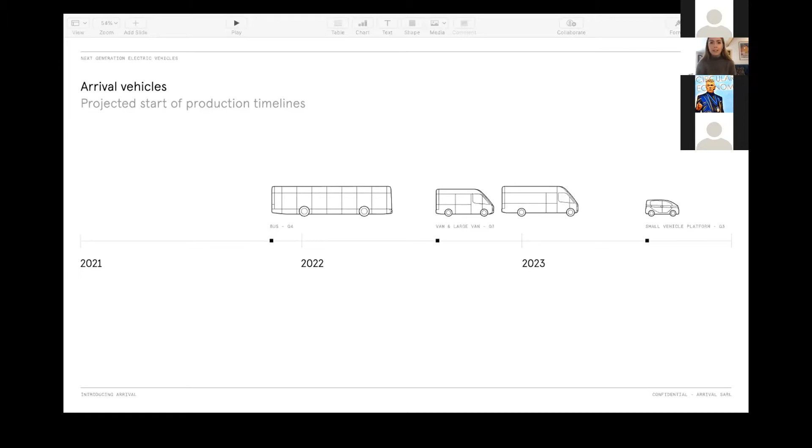So we're currently at pre-production mode with our bus coming out early next year, and our van shortly afterwards in late 2022 and early 2023. So this is a really exciting time for us. We've been in R&D mode, and we're really starting to transition out of that phase and become a very serious player on the global stage.

This is our van, which you may have seen in various news announcements. You can see that it's very different from what you might expect from a traditional Ford Transit van. This is because we've designed completely around the drivers. They've been very integral to the design process. We've had to think, well, this doesn't just need to function as a vehicle, but it's also somebody's place of work. And if you're spending 8 to 10 hours a day in this vehicle, it really needs to function as seamlessly and smoothly as possible.

And our bus, I never really thought I could be excited about a bus, but honestly, it really is a beautiful piece of engineering and has been designed with completely the same consideration to drivers and passengers as our vans. And I guess not just our passengers and drivers, but actually anyone who has to interact with these vehicles.

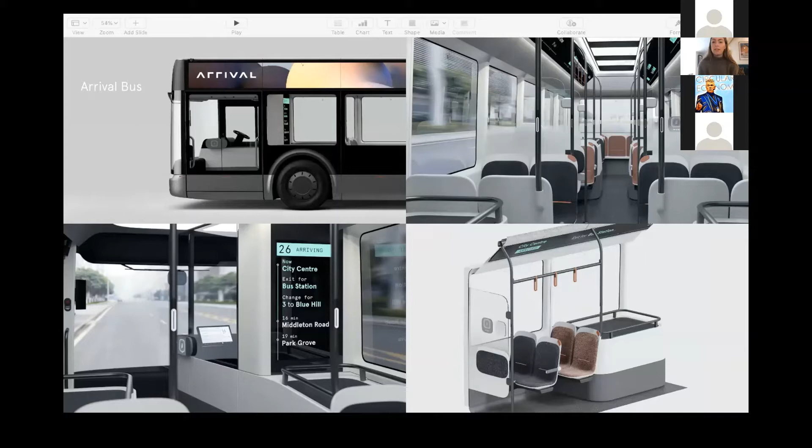So you'll notice on the bottom right hand side that the seats are actually on a cantilever. This is because we know that cleaners only have 4 minutes to clean each bus at the end of each day. So we want to limit any kind of grooves or spaces that they have to clean around so that we can create the cleanest bus possible in the shortest amount of time.

So how have we been doing this? Why do we think that we have a method that has achieved substantially cheaper products than our competitors? Well, really it comes down to something that we describe as the new method, and this comes down to 5 key components.

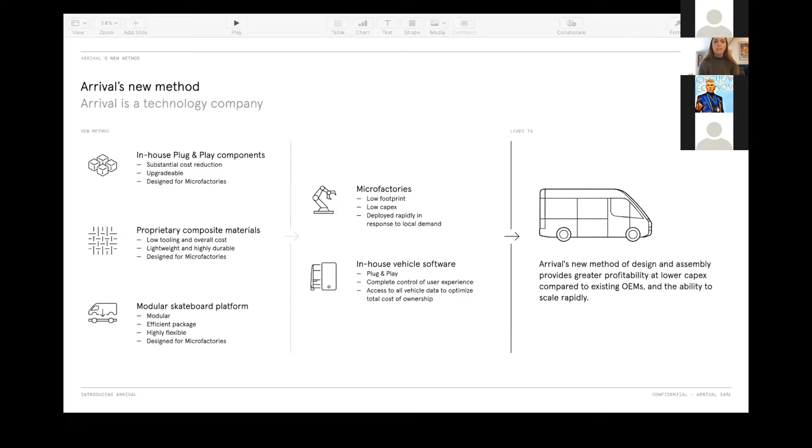So the first of which is plug and play components. Now these are made completely in-house. We pride ourselves on being very vertically integrated, and importantly, they're made within a size architecture. What that means is that our vehicles and their components can go together a bit like a Tetris or Lego-like model. Aside from having very easy assembly, that also means that swapping or upgrading components becomes exceptionally easy. Additionally, they're completely software enabled, so that means we can conduct a lot of predictive and preventative maintenance by tracking each of those components.

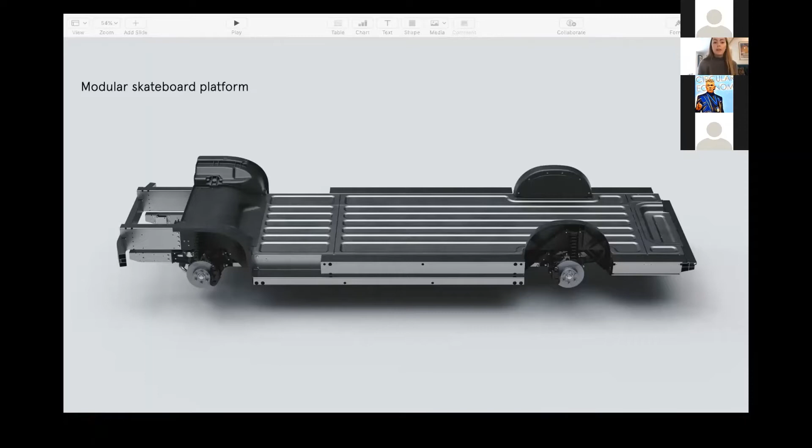Next, we have our modular skateboard platform, so called because it's completely flat, much like a skateboard. This houses our chassis and powertrain. Owing to its configuration being completely flat, it allows us a lot of flexibility, and also for our vans to be able to use the maximum amount of cargo space possible.

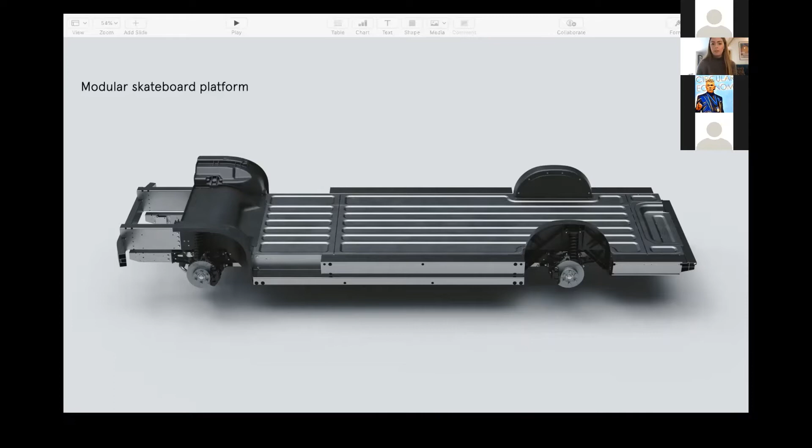We also have this really interesting composite material that, again, we've developed completely in-house. So unlike many traditional automotive manufacturers, we don't use steel or aluminium body panels, but instead use this proprietary composite material. The advantage of that is that it's incredibly lightweight, which is a useful consideration when we think about battery range, but it's also very highly durable, and commercial vehicles go through a substantial amount of wear and tear. So that's a really important consideration. And again, probably most interestingly, they're fully recyclable and super low cost, both with regards to the material itself and also the tooling. And that means that we can make these panels very quickly as well.

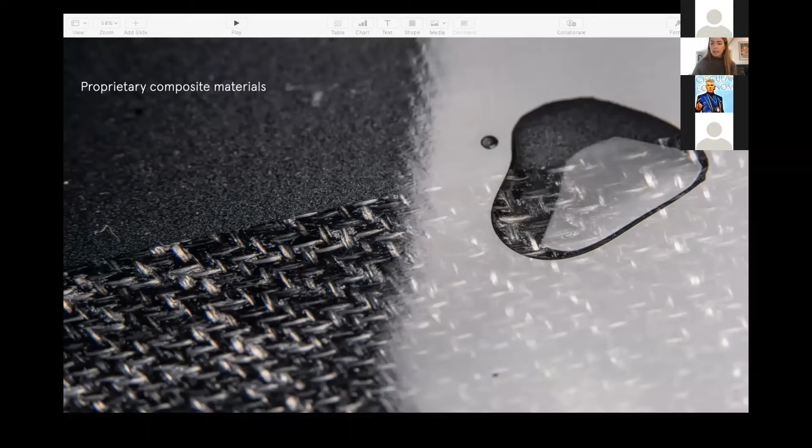And finally, we have our digital ecosystem. As I mentioned, many of our components are software enabled, and this means that we can create a number of supporting tools and services such as fleet management portals, driver apps, even our internal tools that we use within Arrival to start to really optimize the operation of our vehicles out on the road. So I think this really epitomizes the whole concept of device on wheels. And that also means that this is a continuously improving set of operations and vehicles, and we can garner a huge amount of insights from their operation as well.

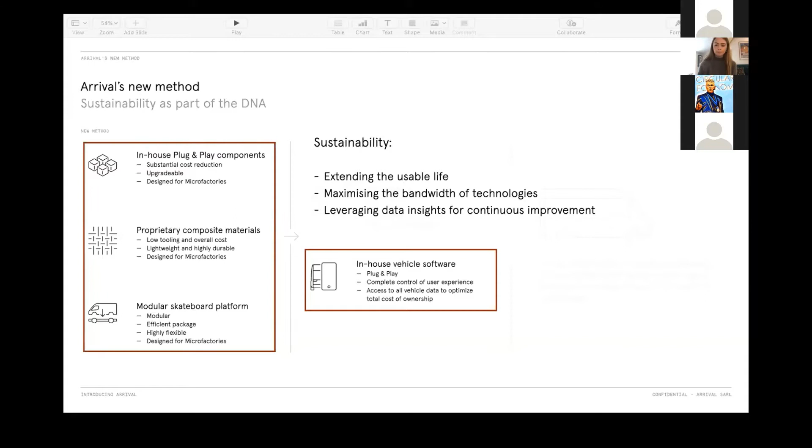This starts to tell you that sustainability is a really core part of our DNA and is considered at every single juncture of a design decision. Everything we do is around trying to extend the usable life of the vehicles, maximizing the absolute bandwidth of our technologies.

And leveraging the insights that we're gathering so that we can have this continuous improvement. But possibly more interesting than all of that is that because of this new method and the way we design and things come together, we can manufacture these vehicles in microfactories, which have a very small footprint, a reasonably low cost compared to our competitors, and can importantly be deployed in local areas.

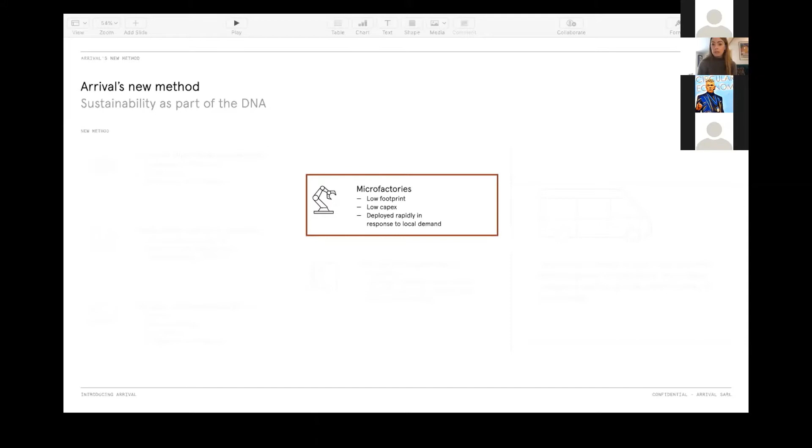Part of the reason we've been able to do this is because instead of having a big, large snaking assembly line, we actually manufacture in these small robotic cells. The reason we're able to do that is because our vehicles are so modular and come together very simply, which means you can start to maximize the capability of each of these robotic operations rather than having this linear step-by-step snaking process.

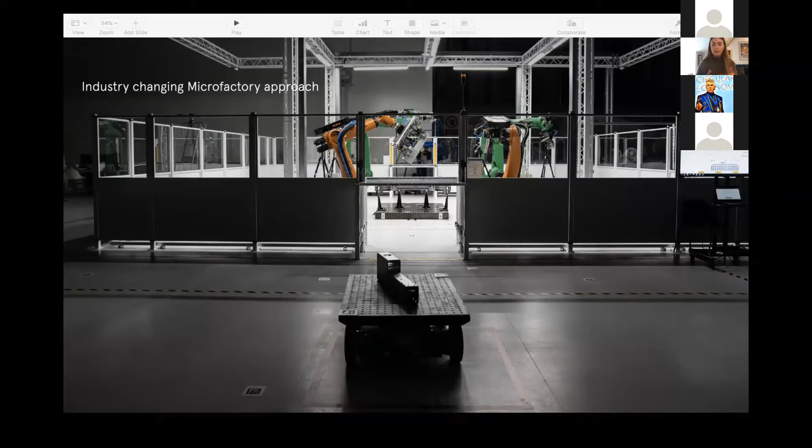Owing to this small footprint, it means they can be deployed much closer to urban centres. We can have many more of them, which reduces our need for polluting onward logistics that you would have with one centralised manufacturing unit. They can also start to create local jobs, supported by an entirely localised supply chain. And it also means the vehicles we're producing are then going to be used in the community in which they're built as well.

But what else? We've spoken about extending the usable life, maximising the capability of our technologies, creating local jobs. Also worth noting that these microfactories, we aim to have as much renewable energy and as low carbon footprint as possible. But what else can we as Arrival do?

Well, what am I really talking about here? I guess our vehicles have this enormous capability to provide a vast amount of insights. And they're also part of this mobility ecosystem, which we know directly impacts people's access to goods, services, communities, and economic opportunity. This can start to have a number of unintended consequences by changing the very fabric of cities, from how they grow, where people live, and innumerable quality of life indicators.

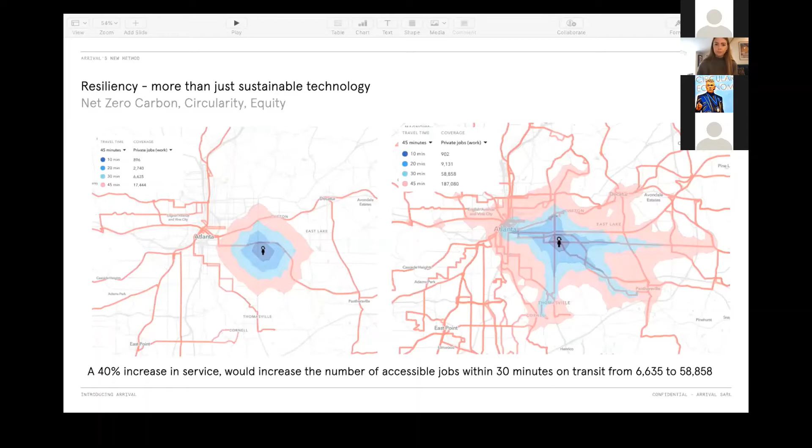And the challenges are pretty similar for commercial vehicles as well. According to the World Economic Forum, the number of delivery vehicles will increase by about 36% in the top 100 cities over the next 10 years. But where are the electric vehicles being deployed, and which are the areas that have the current highest volume of polluting traffic? Typically, and this is true of most places in the world, poor communities tend to live near busier roads or industrial areas, meaning they are exponentially more exposed to air pollutants. This growing number of delivery vehicles is driving a bigger gap in environmental injustice.

So as Arrival, we start to think about our go-to-market strategies and our deployment strategies. These are the sorts of considerations that we can really start to bake into those plans.

So what are we doing about it? Firstly, we really need to start to understand our cities and their challenges with the same rigor and attention to detail that we do for our commercial customers. But cities are complicated, unwieldy, and very vast interconnected ecosystems, and we absolutely cannot profess to be experts. That's why we need to form strong partnerships and collaborations with cities, such that we can start to see how transportation and mobility can be this force to target specific sustainability challenges or social issues for the city as well.

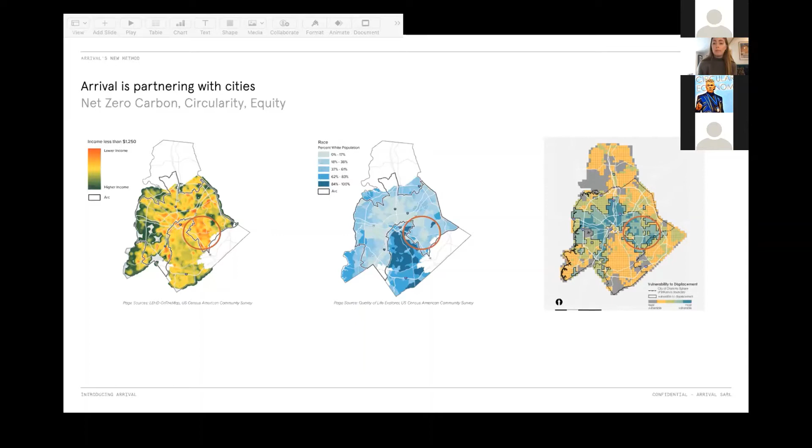So when we start to think about improving accessibility to bus networks, this might be an area that garners much more of our attention and focus, and we can start to work with the city to really understand what we need to do - right from engaging with that community through to actually deploying the charging infrastructure and those additional routes. Again, not just thinking about traditional bus routes, but also demand responsive transit as well.

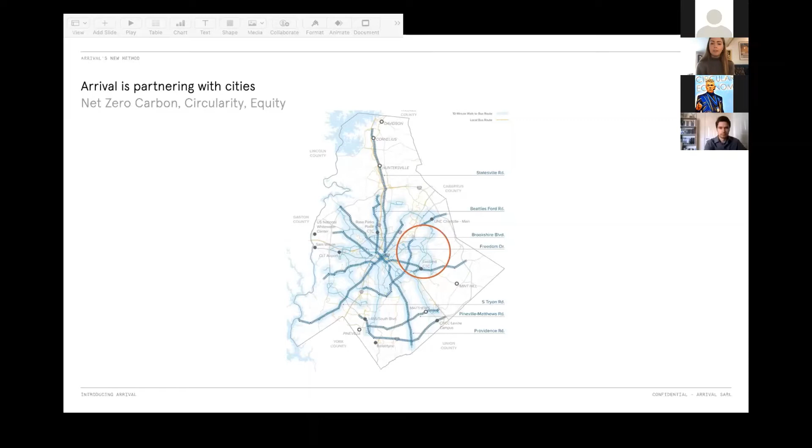I won't dwell too much on that because it's a vast interconnected diagram, but essentially it illustrates my point that we're working with cities, we have this opportunity to influence how those cities function, but in turn those cities will start to influence the future evolution of our products.

So to conclude, our ambitions as a company and in sustainability go way beyond just our vehicles and manufacturing, but actually really focus on creating very resilient systems that can enable these radically better cities. So if you have any questions, please let me know.

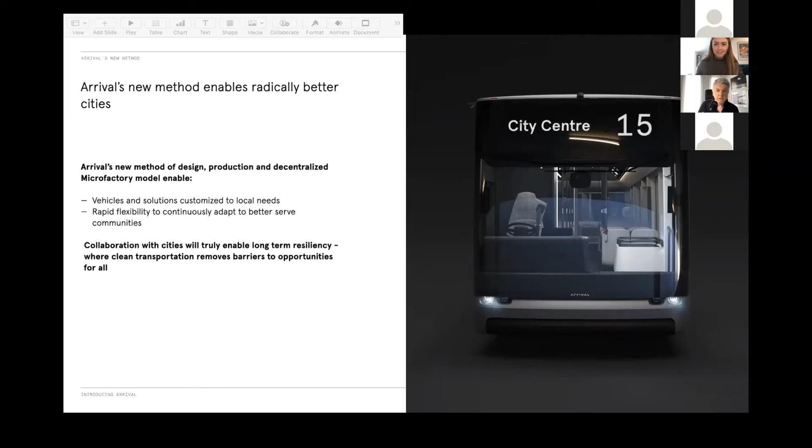He's environmental consultant at HV Systems. So yes, and also, have you got two jobs, Daniel? Because it says DMG Environmental Consultancy and HV Systems. Are you doing two jobs at once? So I have my own environmental consultancy. I do work for HV Systems through that, but I was also an employee of HV Systems before I started DMG. So it's a kind of an amalgamation of both.

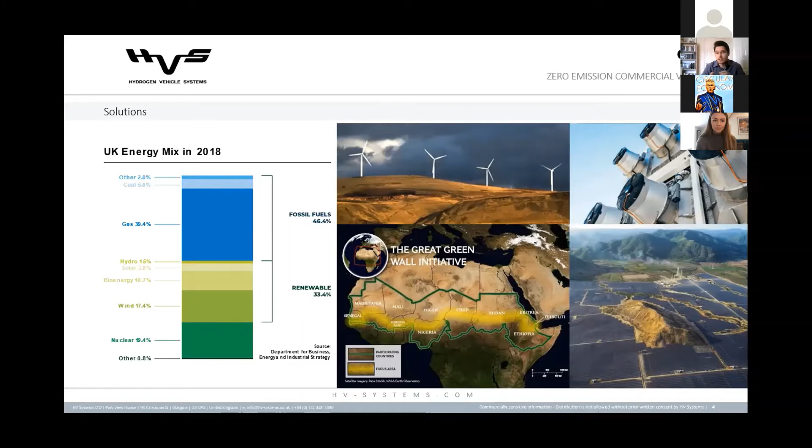Renewables are really good for electricity, but they're not so good for heating, and that's where we can start to talk about hydrogen. In both Fife and Aberdeen here in Scotland, there are plans to trial 300 homes heated entirely by hydrogen.

Where else can hydrogen be used? Of course, it can be used in the transport industry. Obviously, we could walk, we could cycle, we could take public transport to reduce our emissions, or we could avoid transport entirely, which we're all very practiced at now as I speak to you from the spare room in my house. But humans do like to get from A to B.

And since we've got cars, we love to do that in comfort. It's estimated that there are 1.42 billion vehicles on the roads worldwide, and that doesn't include mining and farm vehicles.

Transport is about 14% of global emissions, but that's higher if you count just carbon emissions. In the UK, we're slowly increasing our number of ultra-low emission vehicles, but we are way behind countries like Norway, which has the most per capita, and China, which just has the most. But China generally has the most of everything.

However, there are some limits to battery technology that mean it won't cover all of our needs, such as grid and space constraints on charging, low energy density for larger vehicles, and issues with lithium supply. But that just means we need other options as well.

Hydrogen is the most promising of these. It's zero emissions. It can be produced by renewables. It can be used for energy storage, which means you don't need to take the electricity out of the grid there and then - you can store it and use it when needed. This also means, because of the renewables, that local production is possible for hydrogen.

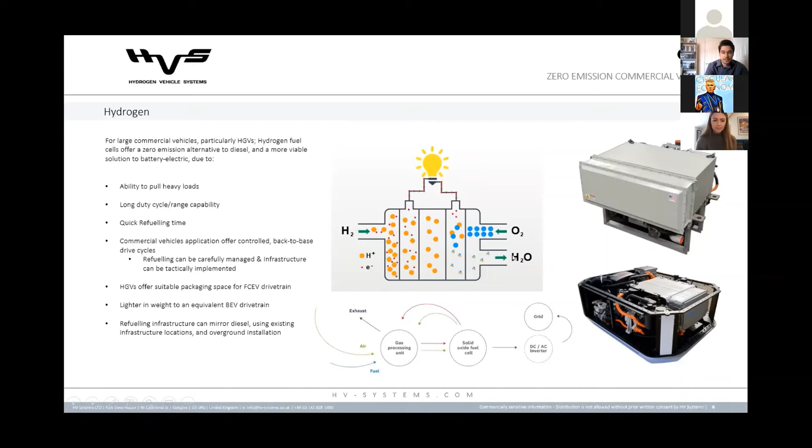So I'll take you quickly through how a hydrogen fuel cell works. Basically, hydrogen comes in and is separated from its electron at the anode. The electron goes off and powers something, say a light bulb or an electric motor. Then the electron comes back and is reattached with oxygen from the atmosphere and the hydrogen again at the cathode, and this produces water. The only byproducts of a fuel cell are heat and water.

What are some of the issues of hydrogen? So hydrogen is a gas, which means it takes up a lot of room. So for transport, it's stored at 350 or 700 bar pressure, and it takes extremely strong tanks to store it like that. When we used to come to conferences in person, we would always get asked about the safety of hydrogen, and something that would always come up is the Hindenburg Disaster.

This was back in 1937, and it's where 36 people were killed when this exploded. However, this was a canvas bubble powered by internal combustion engines, and as amazing as the engineers of the past were, I would say that this was an accident waiting to happen.

This is how hydrogen is stored now. It is exceedingly safe. This Toyota tank has 3 layers: an outer glass fiber reinforced layer that protects against surface abrasions, a middle strong layer made from carbon fiber reinforced plastic, and an inner plastic lined layer to prevent leakage.

I watched a video of this tank, and it took 2 50 caliber bullets hitting the same point to rupture it. So it's very strong, and even if it does rupture, it does have a controlled pressure relief, and hydrogen is 14 times lighter than air, so it just dissipates into the atmosphere instead of gathering in flammable puddles beneath you, as our current fuel choices do.

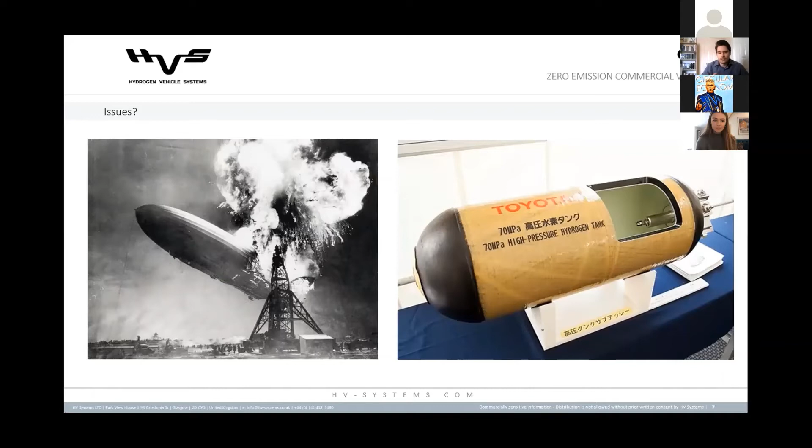There are now plans to roll out hydrogen infrastructure across the world and across this country. We at HV Systems and others are working on that, and we already have the technology that we need to do that. It also makes more sense to create infrastructure for an actually zero emissions fuel instead of for LNG or CNG gas, which is a temporary and still emitting solution.

Hydrogen isn't found in its pure form on Earth, so it needs to be extracted before it can be used. It's already produced in large volumes as part of industrial processes such as steam methane reforming or anaerobic digesters, but the ultimate goal is to use electrolysis.

Electro is electricity and lysis is splitting, so it's just the splitting of water with electricity. It's the reverse of a fuel cell. Water is split into hydrogen and oxygen, and the hydrogen is captured. The amazing thing about electrolysis is it can be done using renewable electricity, making it a 100% renewable zero emission fuel, or green hydrogen as we call it.

Electrolysis also opens up several possibilities for the energy sector. It gives us the opportunity for grid balancing, which can protect the grid from overheating due to excess renewable generation on an especially windy day or an especially sunny day.

It also gives us opportunities for energy storage. Electricity is quite hard to store, and batteries are expensive and they lose charge over time. But hydrogen, once you've produced it, just sits there in its tank, and you can use it when you need it or convert it back into electricity.

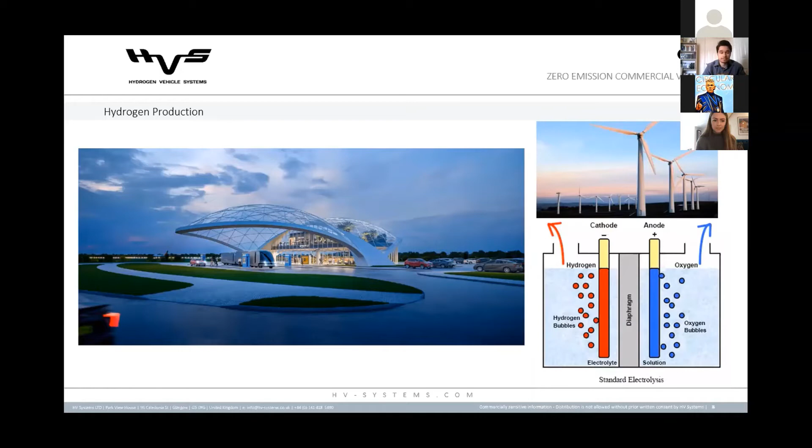That brings us back to HVS. Our goal is to achieve net zero in the heavy-duty transport sector by introducing a range of zero-emission commercial vehicles to the market. Eventually, this will cover all applications from 5 to 44 tonnes, but for now, we're focusing on a medium-duty chassis cab MCV or van and a 4x2 articulated HGV tractor unit. Both of these vehicles are hydrogen-powered, utilising cutting-edge hydrogen fuel cell technology, industry-leading electronic axles, and a wealth of other market-leading components throughout the powertrain.

HVS is a systems integrator, bringing together world-leading components and packaging them into our innovative vehicle designs. Our prototype build for a van is currently underway, and we have completed an in-depth Innovate UK funded feasibility study for a truck, with prototype build due to commence next year.

We've got a highly experienced team and advisory board, and we've secured all the key partners required for our project. A few especially noteworthy members of our team to deliver this ambitious plan are Steve Clayton, our CTO, and Pete Clark, our head of design, who have worked on zero-emission vehicles from notepad to production in the past, including the LEVC van. I also want to point your attention to Dr. David Telford, our head of sustainability, who recently helped Aberdeen to install hydrogen refuelling at their Aberdeen Exhibition and Conference Centre.

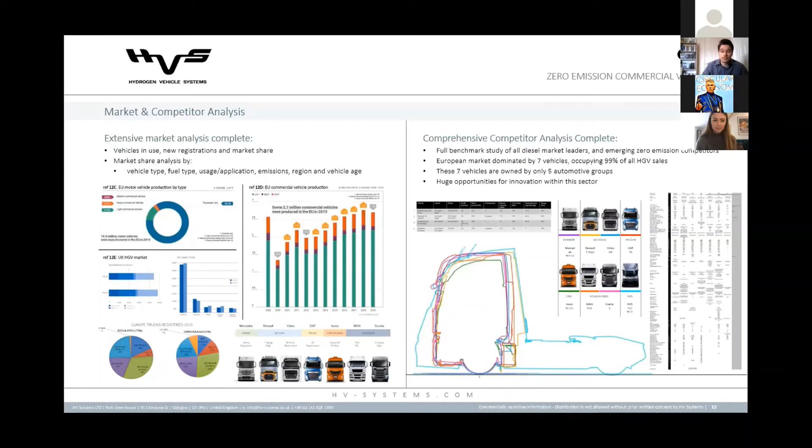The current European HGV market is dominated by 7 vehicles owned by only 5 automotive groups. Our analysis found that there was less than 100 millimeters difference between the size of their cabs. New legislation gives us huge opportunities for innovation within this slow-moving and conservative sector. For example, our cab is 800 millimeters longer, giving improved driver and road user safety, increased driver comfort, and better aerodynamic performance, amongst other benefits.

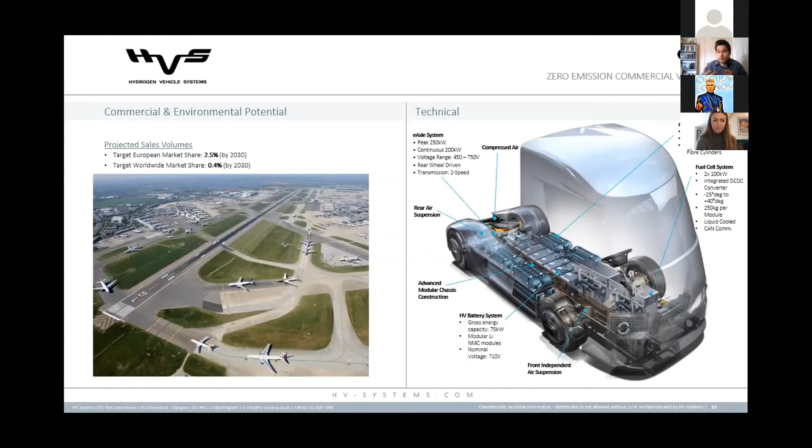One of the main USPs of HVS is that we are a small, highly skilled and innovative team. The environmental benefits of our project are staggering. Securing only 2.5% of the European market, our trucks would save 104 tonnes of CO2, 165 kilograms of NOx, and 4 kilograms of particulate matter every year each. To put that into context, should we reach our 2.5% market goals, this will result in more savings per annum than the entire emissions output of Heathrow Airport.

We're not the only ones operating in the hydrogen transport sector. There are quite a few prototypes coming through on the commercial vehicle market. We have the Honda Clarity, the Toyota Mirai, and the Hyundai Nexo, amongst others, in the car market. There are other more niche applications, such as Element 1's hydrogen plane. There's the potential for hydrogen-powered tanker ships carrying hydrogen between countries, which is already being considered between Australia and Japan.

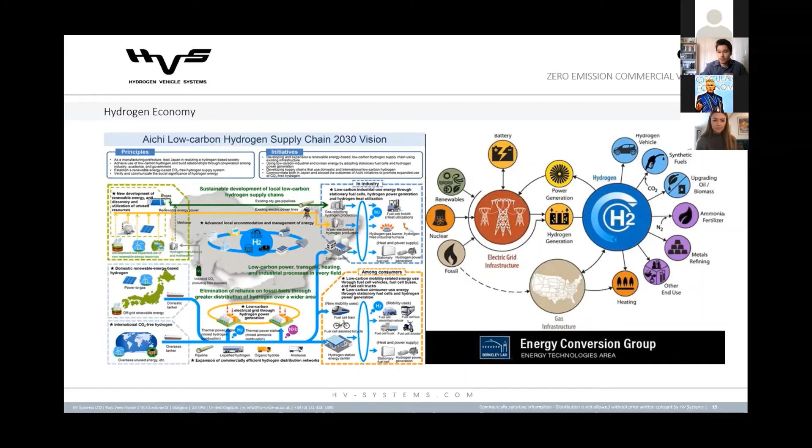In summary, we feel we are the right company to bring hydrogen-powered commercial vehicles to the UK and EU market, because we address 3 points of the government's 10-point plan to reach net zero. We continue the environmental gains seen during the recent COVID-19 lockdowns. Our vehicles will achieve TCO parity with diesel by at most 2030. This project also provides opportunities for sales and tax revenue for the country, job creation, and strengthening the UK's zero-emission automotive supply chain. In summary, we're ready to go ahead with this project.

We have the end users like UPS in place. We have the component suppliers ready to go, and we have an experienced delivery team who have already completed similar projects. That's part of where I find my hope for the future.

But where will you find yours? Because it's out there. There's hope in rewilding and planting trees, in reducing our energy consumption and producing more in renewable ways, in sucking tons of CO2 out of the air and storing it underground where it belongs, and in creating zero-emission vehicles and producing countless more carbon-saving initiatives. We have the ability, we have the technology, and we have the drive. And that's where I think the hope is.